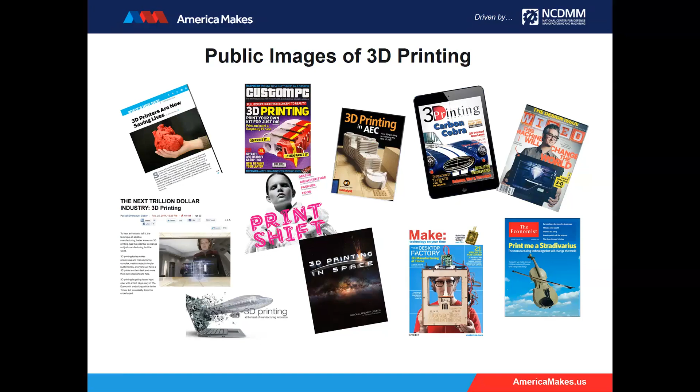For additive manufacturing, we always start from a CAD model of a three-dimensional object, from which all CAD systems can generate a so-called STL file, which is a triangular mesh approximating the surface boundary of the object. From this, we generate slices with inner and outer contours, which software uses to generate trajectories for the tools to follow.

When I say tool, it could be a laser beam, a nozzle for inkjet printing, or for extrusion. You then fabricate the parts layer by layer until it is completed.

There is a standard definition by ASTM International Committee F42 saying that additive manufacturing is the process of joining materials to make objects from three-dimensional model data, usually layer by layer, as opposed to subtractive manufacturing methodologies. They categorize this technology into 7 categories: vat photopolymerization, material extrusion, powder bed fusion, material jetting, binder jetting, sheet lamination, and directed energy deposition.

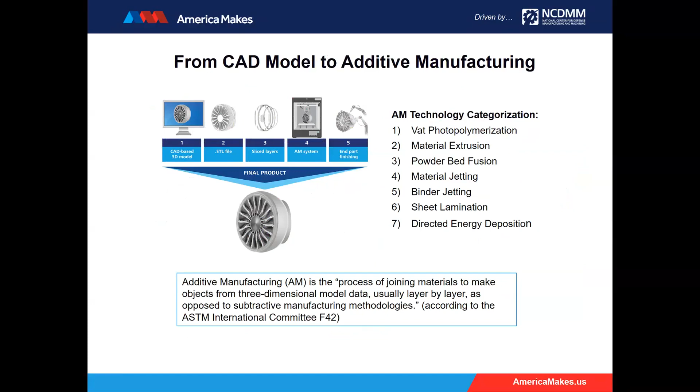I have a slide to summarize and illustrate each of these processes. Vat photopolymerization, popularly known as SLA or laser stereolithography, is where the laser is directed to cure photocurable monomer liquid resin in a vat according to the cross-section of a CAD model.

After that, you put another layer of this resin, and do another layer, and so forth until the part is completed. Material extrusion, well-known as fused deposition modeling, involves material, usually thermoplastic in filament form, melted by the head and extruded under pressure, just like toothpaste, layer by layer. For ceramics, putting material into filament form would be difficult unless the viscosity is very low.

In that case, we could just make a paste directly, which could be organic or aqueous. Powder bed fusion is a very popular process where the powder is in a bed, and a laser—could be CO2, Nd:YAG, or even an E-beam—melts the layer according to the cross-sectional geometry. Every layer, you add another layer of powder, and a roller spreader flattens the surface to add another layer.

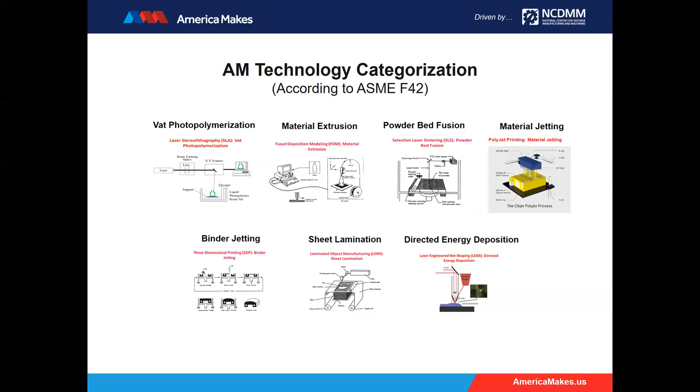Lastly, directed energy deposition, sometimes called LENS or laser engineered net shaping, because it was initially developed by Sandia National Laboratory. In this process, a laser melts powder, or sometimes rod, provided through a nozzle. You melt the material, it solidifies, and you move to the next layer. So these are the 7 categories of additive manufacturing processes, and I have video clips to show them.

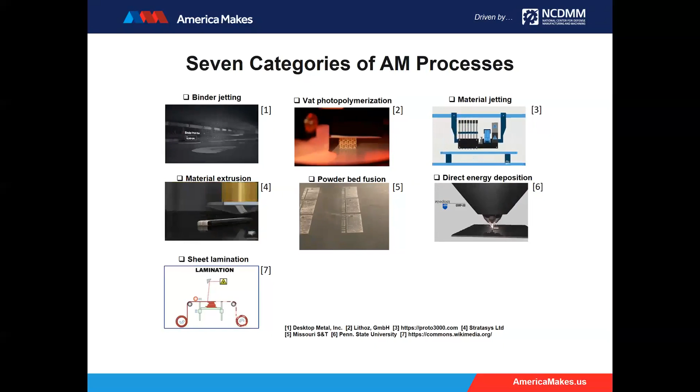So why AM? Why additive manufacturing? What are the unique advantages of this manufacturing process? What are some representative applications? I will go through this in the next few slides.

The main advantages of AM are: first, geometric complexity—we can make geometrically very complex parts at no additional cost, unlike conventional processes. Second, material complexity—you could have multiple materials or gradient materials built into the same part. Third, structural complexity—you could have a lattice structure of various architectures.

You could remove some materials not affecting the performance through topology optimization. And because of the nature of the process, you add material bit by bit, layer by layer, and you can make very complex geometry. This is really good for personalization and individualization, such as in the healthcare industry, for making medical devices, implants, dental prostheses, and also good for part repair. And finally, you could make integrated active systems, including the structure, components, sensors, and actuators, without having to go through the assembly process.

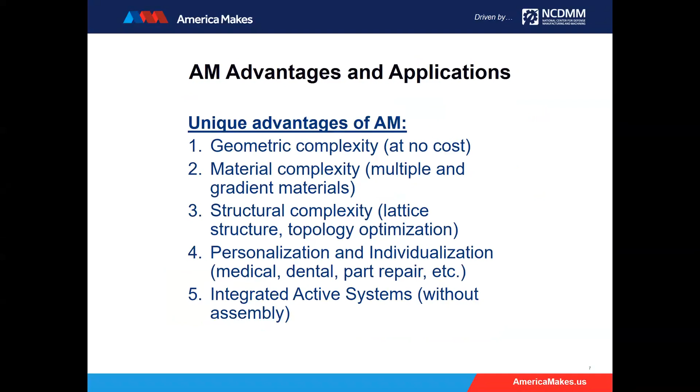These are some aerospace applications. A more recent, well-known one is the Boeing 787, which uses titanium parts made by additive manufacturing, FAA certified. For each of those parts, the estimate could save about $2 million. Also, if we have a titanium turbine blade, which is very expensive, and the blade is broken or worn out, you don't want to just throw it away. So you could use additive manufacturing - in this case, a laser process, direct energy deposition, to repair the part with excellent properties, just like the original one.

A famous example is the fuel nozzle for the LEAP engine by General Electric, shown on the bottom left. This used to be more than 20 components that had to be joined together into this fuel nozzle, but with additive manufacturing, they can make all of it in one piece.

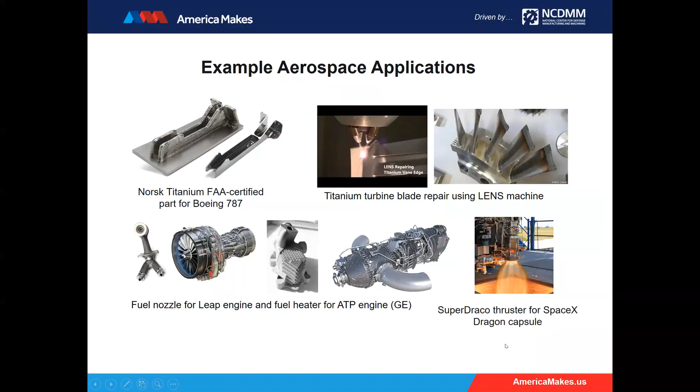Another example is a fuel heater for the ATP engine, also by General Electric. Another example is the thruster for the SpaceX Dragon capsule.

In terms of automotive applications, this shows some examples. You can see this can be used for car chassis, and for front structures for media storage and crash optimization with internal cooling channels. All those parts, if not made by additive manufacturing, would need to be made into many components and then joined together.

Also, with additive manufacturing, we could have conformal fuel passages, as shown here with the 3D printed pump by Delphi. In the conventional process, you have to use a drill to make holes for this fuel passage, which is not as good as using additive manufacturing. And also, we could have all kinds of lattice structures to increase shock energy absorption in a crash.

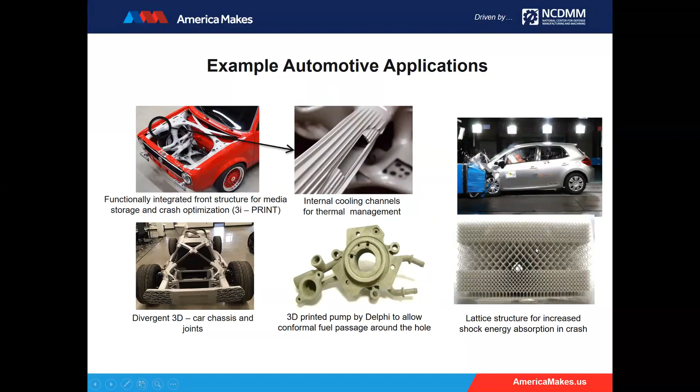So those are metal parts. How about thermoplastic components and ceramic components? This shows some polymeric parts by AM, including the Invisalign clear aligner for orthodontics, very famous. Also, Envision Tech hearing aids, which are put into the ear - everybody has a different shape, different geometry, so this is very good for personalization.

We have some parts here, like gears made by HP's multi-jet fusion technology. You can have different materials, different colors, very sophisticated geometry and assembly. This car, the Cobra, shown here is 26% lighter in weight and is made by additive manufacturing. This was demonstrated by Oak Ridge National Laboratories - they were able to do this from the concept of wanting to do additive manufacturing, plus the polishing, painting, everything together, all in 6 weeks.

And finally, at the bottom, we have this shoe. The shoe sole is made by additive manufacturing with a lattice structure by a carbon machine. As you can see, it takes advantage of additive manufacturing to make these lattice structures in all kinds of different designs, with some good functions, like being able to put on the proper pressure in certain parts. So this is the good advantage of additive manufacturing.

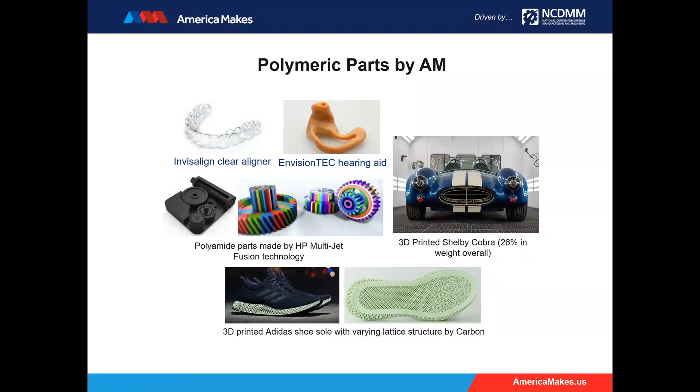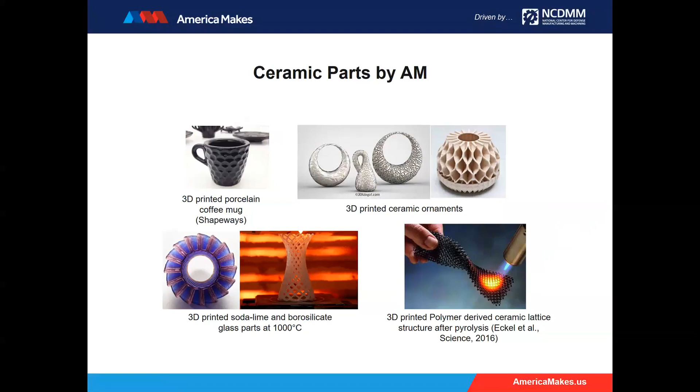Ceramic parts by AM - you can see here some design coffee mugs, ceramic ornaments of various kinds, also glass, amorphous ceramics, different kinds of glass for ornaments. Often ceramics are difficult to shape, so one way to do it is to print a polymer, because a polymer can change shape more easily, and then derive ceramic components from the polymer, including lattice structures, which can be done after pyrolysis of the polymers.

So those are single materials of complex structure, but we could also use additive manufacturing for 3D printing of multiple and graded materials. We can integrate additive manufacturing with direct writing to make structural components with electronics, and we could even have conformal printing according to the shape of the structural components, placing it on the surface. We could have more than just multiple materials - the materials can be graded, mixed together, and doing some grading.

As you can see here, we have some helmets, some boots, eyeglasses, and by the use of multiple materials, we can change the colors, we can change the properties. Some portions you'd like to be hard, some portions you'd like to be soft, and you have all these choices. The gradient materials allow you to design not only geometrically correctly, but also to have the desired properties as well as the colors.

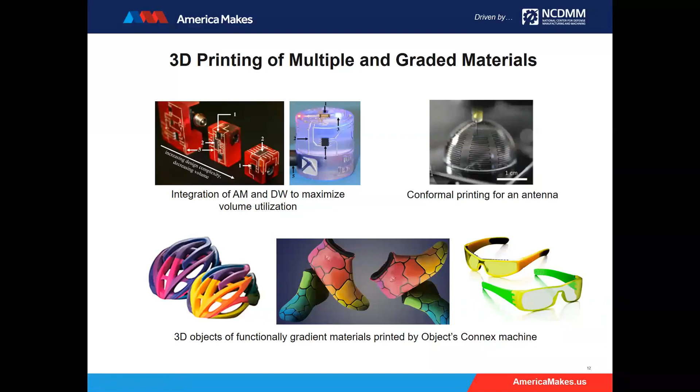This one shows a study of a European project looking at the impact of additive manufacturing on the environment to reduce CO2 emissions. This particular example uses a swivel arm for a TV screen on an aircraft. Conventionally this is done by machining, and they compare that with selective laser melting of a lattice structure, as well as selective laser melting of optimal geometry through topology optimization.

They look at life cycle impact of CO2 emission, which requires looking into CO2 emission due to raw materials, manufacture of the components, distribution of the products, and finally usage. Because this is used in aircraft, the usage CO2 emission dominates all the rest. By the use of additive manufacturing, it can reduce CO2 emission by more than 50%.

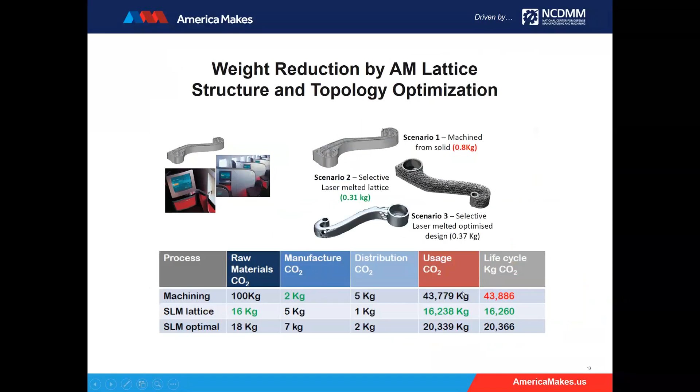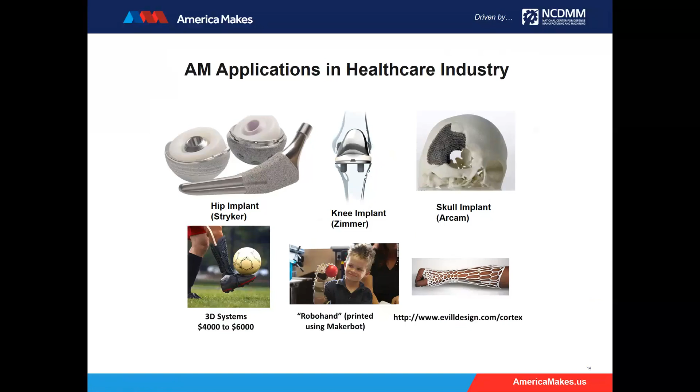There are applications in healthcare industries. Additive manufacturing is perfect for healthcare because everybody has different shapes in terms of their needs, their body, their skills, and so on. So we could use additive manufacturing to make a hip implant, knee implant, skull implant, and also orthoses for protection devices for the legs, hands, and arms.

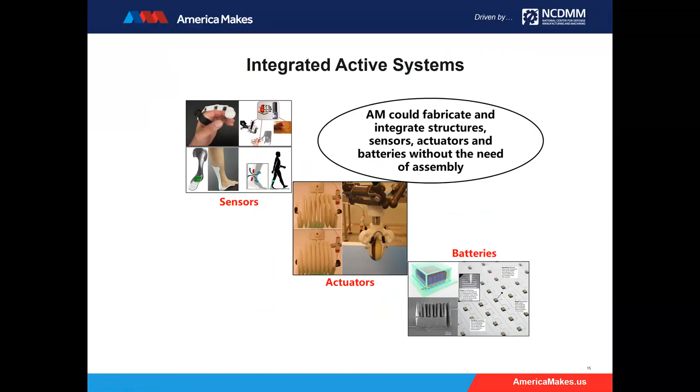Finally, we could use additive manufacturing to fabricate integrated structures with sensors, actuators, and batteries all together without having to go through assembly, ending up with robots for the land, for the sea, and for the air. All these are possible through additive manufacturing.

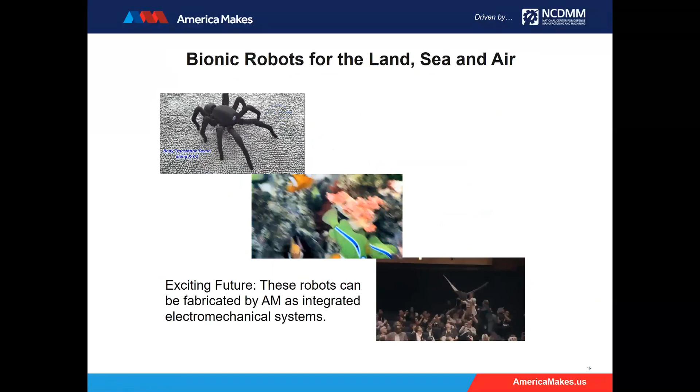I want to talk about some recent advances in additive manufacturing, mainly the work done at Missouri University of Science and Technology by myself and my colleagues. We are very strong in additive manufacturing research, with about 15 faculty members doing various kinds of additive manufacturing research.

We have a long history starting from 1995. I started working on rapid freeze prototyping of water, basically freezing water droplets to form ice sculptures, which can be used as patterns in investment casting in lieu of wax patterns. My colleague Dr. Frank Liou was working on direct energy deposition for making parts, as well as integrating with CNC machines, so that you have hybrid additive-subtractive manufacturing.

We worked on lots of different things: ceramic additive manufacturing with organic paste and aqueous paste, which could be at sub-freezing or room temperature. We use selective laser sintering for making ceramics, and we develop additive manufacturing for glass. We do direct energy deposition for welded metals. We look at fused deposition modeling of high-performance thermoplastics. We developed a new process called laser foil printing. We look at optimization of selective laser melting, and also electronics additive manufacturing, battery additive manufacturing, and additive manufacturing at the micro and nano scale.

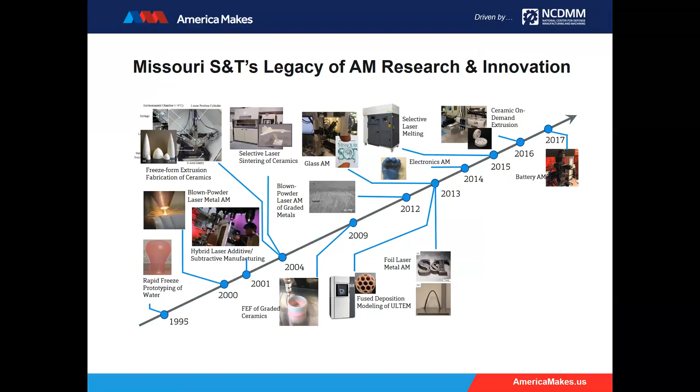This process we call ceramic on-demand extrusion process. You can see the schematics, the equipment, and the parts made by this process: turbine impeller, gears, blower housing, thin wall parts. The part is made in a little tank - it's not immersed into the liquid, but after each layer is built, liquid is added to flush with the surface to prevent uneven evaporation of water from the side. Drying is done by radiation heating from the top, to prevent warping and cracking. We have shown that we are able to make parts from alumina and zirconia up to a relative density of 99%, which is very good.

Very nice fracture strength, and also the materials can be mixed together to make functionally graded materials.

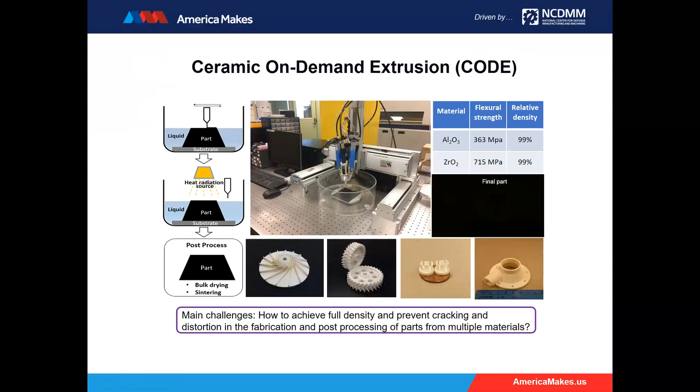My colleague Ed Kinzel was working on glass additive manufacturing, using a laser to melt the glass rod. He could use more than just one glass rod, and they could have different refractive index, and provide different feeding rates to have different compositions. Therefore, you can make transparent glass of

varying refractive index, in addition to making glass artifacts of

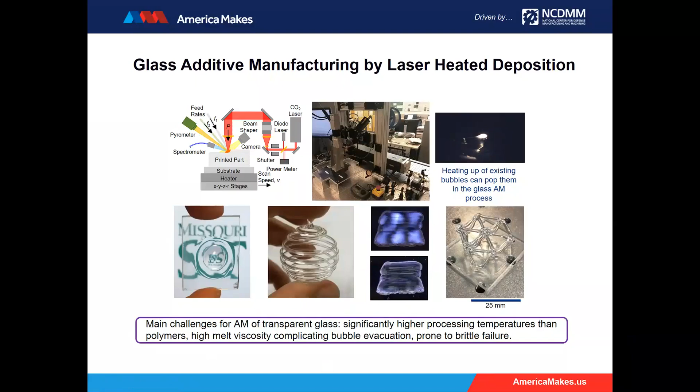different geometries for ornaments. The main challenge here is that the processing temperature is higher than polymers, and the viscosity is high, which is good and bad. Good in that it allows you to make a free-standing structure, but difficult for bubbles to evacuate, and also glass is much more brittle.

This one shows directed energy deposition of functional gradient materials. This is done by my colleague Frank Liou. In this process, the main thing is that we want to do gradient materials because they have different properties. Some may be stronger, some other materials may be lighter, or could be more corrosion resistant, wear resistant. So we want the ability to vary material from one to the other.

But if we just change from one material to the other material, the thermal expansion may be so different, and they tend to crack. So you want to have gradient materials, you want to change gradually. In this case, we change the gradient.

The material composition from pure titanium to gamma titanium aluminide. You can see we have a region from 1 to 6, changing the composition between the two materials from about 100% one material to 100% the other material, going through the gradient change of composition. You can see that the microstructures are different, the composition in terms of titanium content and aluminum content are different, and the hardness is also different.

And this is very important. This allows us a lot of flexibility to build parts with not just a single material.

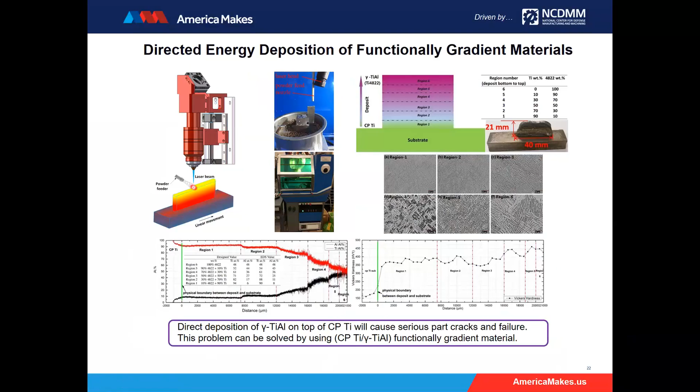We also developed a process called laser foil printing, which is essentially a layered process where you laminate, like laminated object manufacturing, laminating from one metal foil to another. But you cannot simply laminate because it's difficult to bond them together. So what we do is spot welding, and then continuous laser to do pattern welding.

So you weld the top layer to the bottom layer, but then you go through the cutting process using the pulse laser so that you can cut every cross-section to have the right

contour. We have shown that this process, because of the use of foil instead of powder or rod, has higher thermal conductivity, and therefore higher cooling rate, and therefore higher strength of the part made. Also because of the high cooling rate, this is good not only for making crystalline metals but also for amorphous metals or metallic glasses.

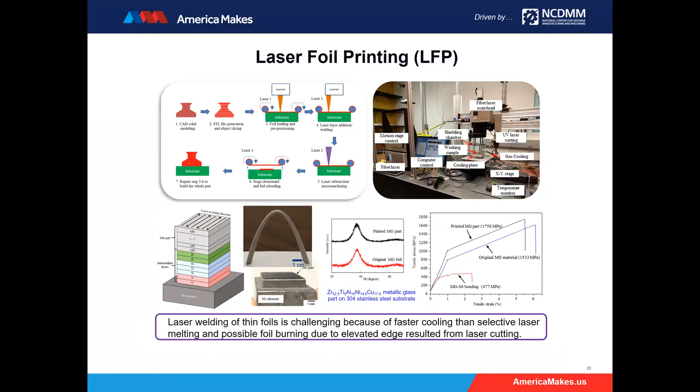So here we show that we are able to make parts from metallic glasses. Sometimes it's difficult because of compatibility issues, you may have to have some intermediate metals including the metallic glass. So all of these are part of our research.

We also have counted - this is Heng Pan working on 3D printing of lithium-ion battery. You can see he used aerosol, fine jets to make the parts, and it could be different materials. As you know, in a battery you have the materials - you need active materials, you need electrodes, you need current collectors, and so

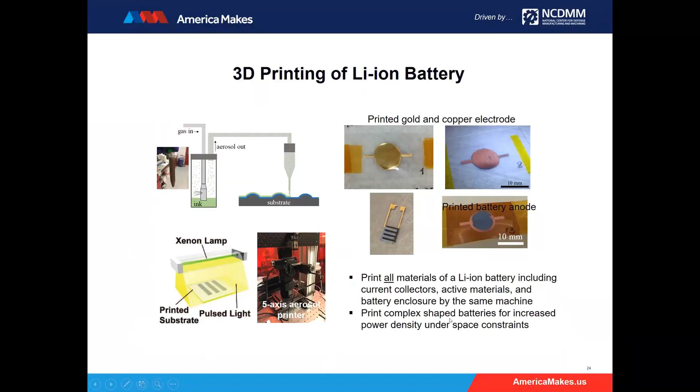with additive manufacturing we can have all these different materials made by a single machine, including all these materials plus even battery enclosure. With the use of additive manufacturing, we can print complex shaped batteries for increased power density in space-constrained applications.

Another research by Dr. Heng Pan is very interesting - micro-nano 3D printing by femtosecond laser. Here we are not talking about macro or meso scale, but micro and nano scale. You can see he is making gold pillar arrays, with width less than 1 micron. The way this is done is by

excitation of nanoparticles using femtosecond laser in making the 3D micro-nanostructures. This process provides a lot of flexibility. We all know two-photon lithography for making micro-nanostructures in polymers, but with this process, we can make them in metals, ceramics, and semiconductors. One example application is high power density micro battery.

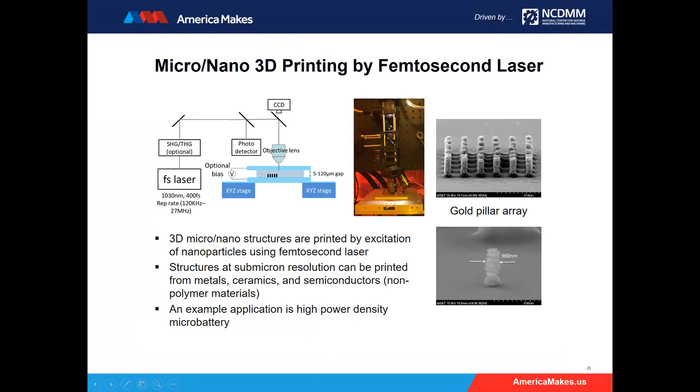Okay, so next I want to talk about some future opportunities in research and innovation.

So there was a lot of research to be done. One of them is to have engineer material properties, not by changing chemical compositions, but by structures. We can have exactly the same materials, but change the material properties through the design of lattice structures. We know that a metal tends to be stronger, but density is higher than polymer and all that.

But the main thing is that with lattice structures, no matter what the material is, there are different kinds of lattice structures. There is a bending-dominated lattice structure, which is good for absorbing energy. But if you want strength, you want a stretch-dominated lattice structure, shown there.

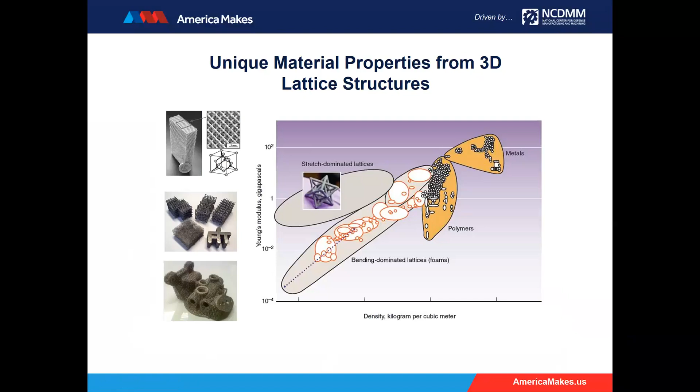And also, if you want to have some exotic properties such as negative Poisson's ratio, which is often called an auxetic structure, you could also do that. And that's possible because of the design of lattice structure.

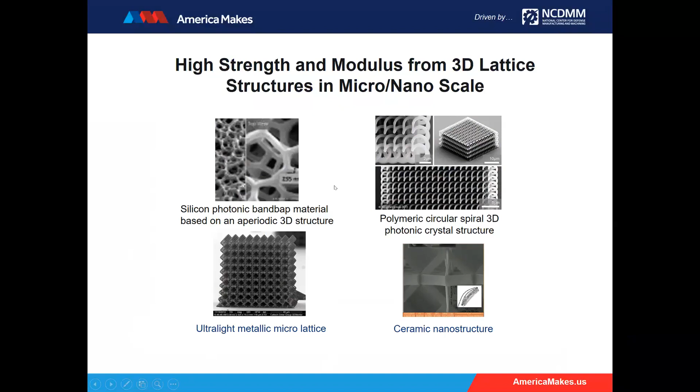Not only in meso and macro scale, but also in micro and nano scale, we could have different lattice structures, which could be periodic or aperiodic, and the material could be polymer, metal, or ceramic. We can design and fabricate these micro nano scale lattice structures to generate high strength and modulus, so very high strength to weight ratio.

Another way of generating new properties is not by lattice structure, but by material. We could have gradient materials, as I mentioned. So some materials may be strong, other materials may be hard, corrosion resistant, or wear resistant.

So depending on applications, for example, if you have two surfaces in contact, you may want the material to be wear resistant, but on the other portion of this part, you want it to be strong and tough and absorb energy. Therefore, you want to build the parts with gradient materials, with multiple materials, but because of the possibility of warping and cracks, you want to have gradient materials.

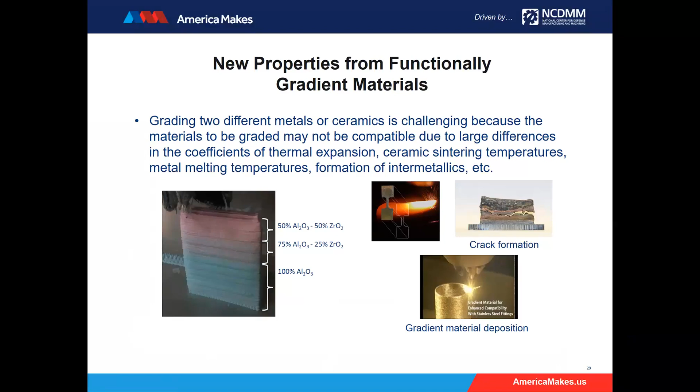But the difficulty of having graded metals or ceramics is that they may have different coefficients of thermal expansion, so it's easy to get warping and cracking. Also, the ceramics may have different sintering temperatures, and metals could have different melting temperatures, and they could form intermetallics. So these have to be taken into consideration in the design of gradient materials to make sure the materials are compatible, or maybe you need some intermediate materials in between to make it work.

Modeling and simulation is always very important. People have been doing a lot of modeling simulation, but in future research we need to look not only at process modeling simulation by looking at the melt pool. Right now, most people are looking at, let's say in the case of selective laser melting, thermal modeling and simulation to predict microstructure and mechanical properties. But they have not looked into the upstream.

What do we mean by upstream? Well, what is the powder bed density, and how is that affected by the various material and process parameters? These are also important. So in the future, we could include in the modeling simulation the discrete element method simulation to predict powder bed density as a function of the powder morphology, powder chemistry, powder geometry, and so forth.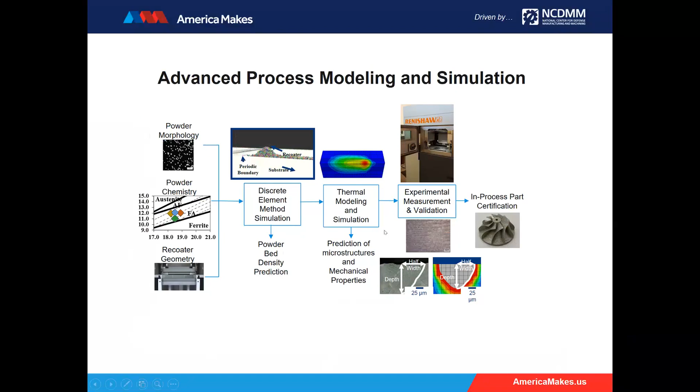And with that predicted powder density as input to the thermal modeling and simulation, which then predicts the melt pool geometry and microstructure and mechanical properties, which of course have to be experimentally measured, this contributes to in-process part certification.

In order to have a good model, we need to have a good understanding of the physics, so advanced instrumentation and measurement are important. This shows work done by my colleague, Lianyi Chen, in collaboration with Argonne National Laboratory. They have the equipment and facility to do in situ X-ray imaging and diffraction.

He is basically looking at, when the powder is melting, what's the dynamics of the powder particles spattering. You can see there are particles, and when it is heated up, it's going to spatter. This X-ray imaging allows you to observe that, and that information can then be incorporated into a mathematical model. Another aspect is to look at the melt pool to better understand the melt pool dynamics, the powder melting and solidification, which is extremely important for modeling simulation of the melt pool temperature and geometry.

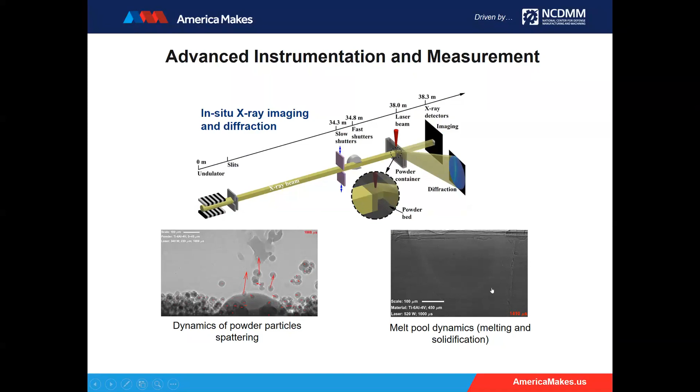Additionally, we need to look into advanced process monitoring and control, because currently most additive manufacturing processes are open loop control. They tune the best process parameters to make the best part.

The way they are doing this, which we call part-to-part control, is that you provide some input, like powder morphology, chemistry, laser power, hatch spacing, and so forth, and use that set of parameters to build the part. You change the values and build other parts. At the end, you try to find the optimal set of parameters for building the best parts, and of course also look into thermal modeling, thermal history, microstructure, and engineering properties.

The problem is there's a lot of uncertainty. The powder morphology and chemistry, every batch of powder is different. There's also a lot of uncertainty in the process parameters, and the environment may change—humidity and temperature may change.

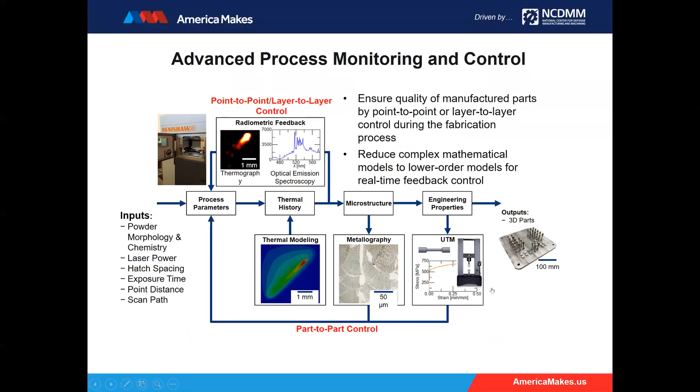So with so many parameters, in order to assure the quality of manufactured parts, we need to do feedback control—point-to-point or layer-to-layer control during fabrication. For this feedback control we also need mathematical models, but these are very different from advanced modeling simulations, which use very sophisticated models for the best prediction. For feedback control you want a simplified model, otherwise you cannot do real-time control. So we want to reduce complex mathematical models to lower order models for real-time feedback control.

In-process part certification is very important because in additive manufacturing, unlike conventional processes, there tend to be more variations. So you cannot simply make a batch of parts, select a few, test those, and be done—you almost have to certify every single part. But certifying every part at the end of fabrication would be very time-consuming and costly, so what's desirable is part certification during the fabrication process, not after manufacture.

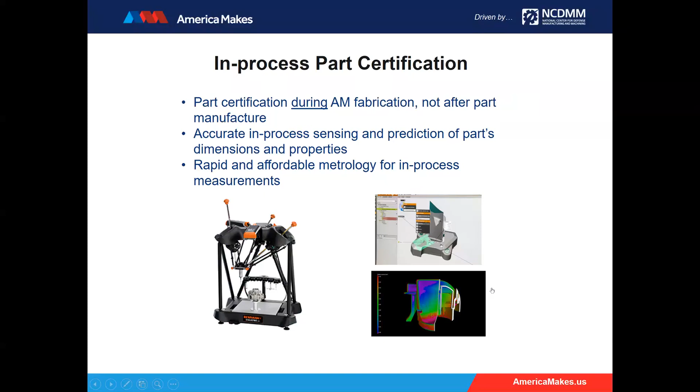In order to do that, we must have accurate in-process sensing and prediction of part dimensions and properties, and rapid, affordable metrology for in-process measurement.

And then process innovation is very important. Companies care about this—you want to make parts faster, larger, and cheaper. So those are three things: bigger, faster, and cheaper.

As you can see, there are several machines here. This binder jet based additive manufacturing machine—they said it can print 10 times faster than current machines. They also claim to have a selective laser melting machine, which was the largest in the world at the time.

And HP has a multi-jet fusion printer. They say it's 10 times faster and 50% cheaper than other 3D printers for similar purposes.

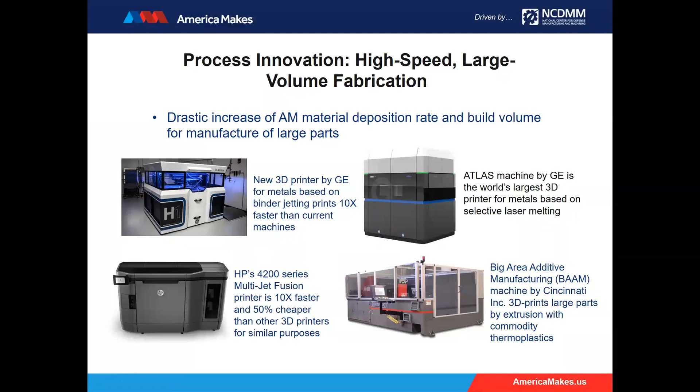And this big area additive manufacturing machine by Cincinnati Incorporated, in collaboration with Oak Ridge National Laboratory—in fact this is the machine which made the carbon fiber sports car animation. They're able to make large parts very quickly, and more importantly, use commodity thermoplastics, drastically reducing cost.

In process innovation, I think the most challenging one is 3D bioprinting. In 3D bioprinting, we are trying to make scaffolds, tissue models, and eventually organs.

But this has a lot of complication and difficulty, because we are talking about making many components—for organs, the artery, vein, and capillary networks, and lots of different materials, all at very fine resolution in terms of dimensions. So we need novel bioprinting to fabricate complex external and internal geometry that fulfills biological, biophysical, biochemical, transport, and anatomical requirements. This is very challenging.

And there are people doing research on this. You can see here people making an artificial ear, some cartilage, tissue on a chip, and hydrogels with internal channels that can be perfused with cells using digital micromirror devices. These are just some examples, but this is just a start.

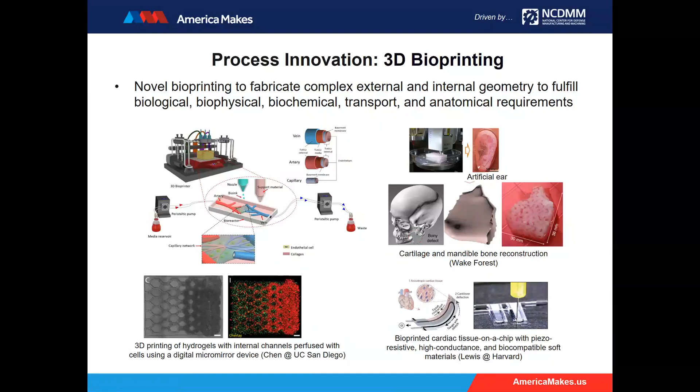Besides process innovation, another important area in 3D bioprinting is material innovation, because you always need both process and materials. We need to create tissue models, or even functional organs, using novel biomaterials and growth factors, as well as multiple cell types. There's a lot of innovation to be done.

Today, people are trying to make artificial organs using a decellularized approach—they take organs from humans and animals, remove the cells, use the remaining materials, and then seed new cells into them. But in the future, what will be desirable instead is bioprinting of anatomically accurate, embryonic-like organs.

So you don't use those decellularized materials, but you just take some synthetic materials, put some embryonic cells in there, and try to make the organs. Of course, that is more into the future, but the more immediate use is making tissue models. In that case, material is still very important because we like to use synthetic material that provides the same characteristics as human tissue, like human liver tissue as shown here.

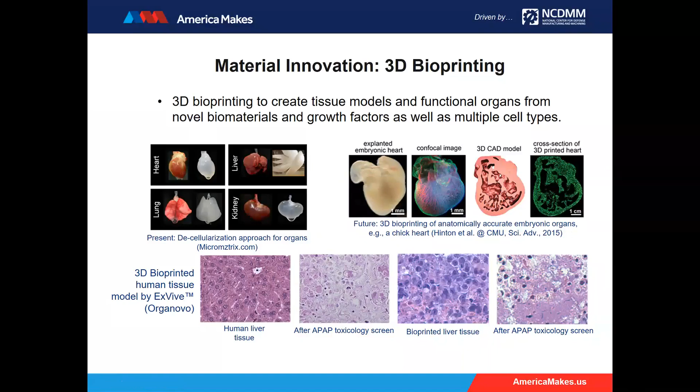Finally, there's 4D printing. 4D printing is 3D printing of programmable materials to create structures and objects that can change shape in response to changing environments such as temperature, pressure, humidity, magnetic field, and so forth. As you can see here, some examples.

You can have this 2D structure, and you can program that by putting in some heat, and depending on your programmed heat, you can then change it to different 3D shapes. It's kind of nice to do that because trying to make those 3D shapes directly may be difficult.

Another example is the use of hydrogels. You put that into liquid, and you start with 2D shapes, and then gradually change to 3D. This has the properties of shape memory, except this is geometrically much more complex.

So in summary, I have given a brief overview of additive manufacturing processes. I talked about the unique advantages of additive manufacturing, the representative applications in various industries - aerospace, automobile, electronics, healthcare, and so forth - and I presented some recent advances in additive manufacturing technology due to research at Missouri University of Science and Technology.